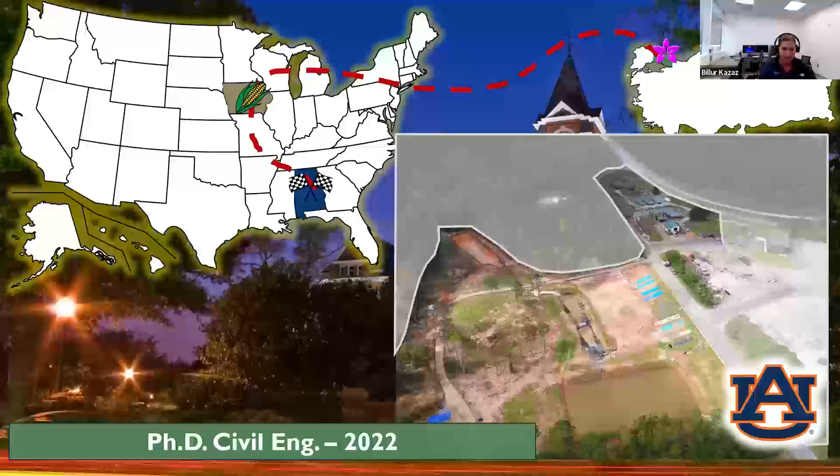Then it was my dream to come to the US for higher education. So my adventure took me to Iowa State, and that's where I got my master's degree. I joined Dr. Perez's group there. Iowa was too cold for me. As a research group, we moved down to Auburn. It was a warmer environment. I loved my time in Auburn. I got my PhD from Auburn University, where I did my research at this beautiful research facility, the Auburn Stormwater Research Facility. Here are some photos from my grad school days, where I was flying drones, building a flume, working in the lab, collecting soil samples. So I had a fun time during my PhD. It was a very hands-on experience.

With that, my next location was Atlanta. So I joined Geosyntec Consultants. I'm an engineer there working in the water resources group. As Matt mentioned, I work with multidisciplinary teams to provide stormwater designs. I provide compliance support to our clients, both for construction and industrial purposes. I couldn't move away from Auburn, so I stayed close to it.

With that, we can dive into flocculants. Due to the nature of disturbing activities and grading activities on construction sites, these sites tend to create a potential to discharge sediment into downstream water bodies. According to EPA, construction sites tend to create an annual soil loss up to 100 tons per acre. With that, there are rules and regulations in place, and the construction general permit requires us to implement stormwater pollution prevention plans on sites and incorporate construction stormwater management practices to minimize soil loss and capture sediment on site prior to off-site discharge.

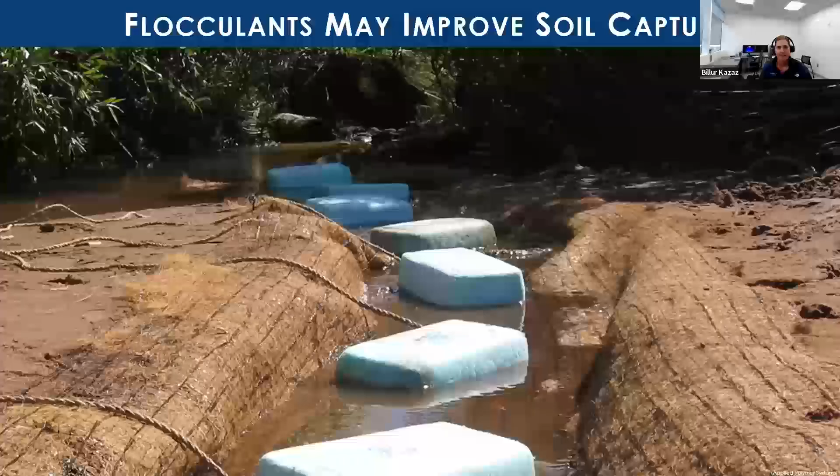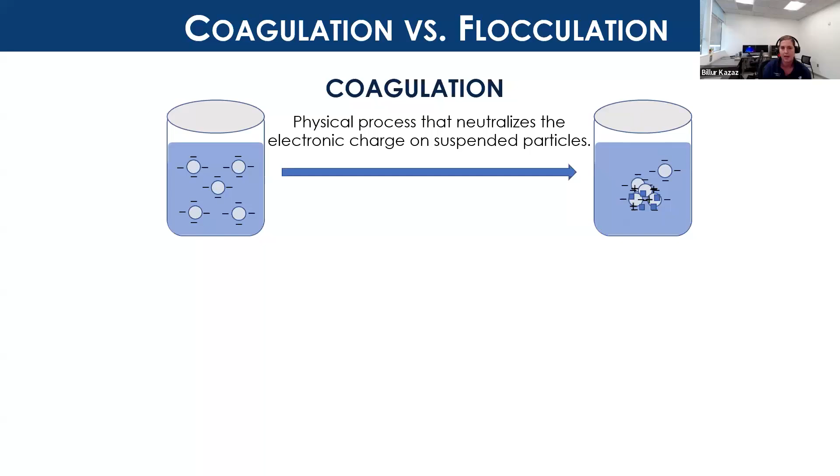So where flocculants come into play: flocculants are one of the tools that we can use to help capture sediment on site by capturing fine-sized soil particles when we incorporate them with erosion and sediment control practices. These chemical treatment tools facilitate coagulation and flocculation. So let's talk about these mechanisms a little bit. Coagulation is a physical process that neutralizes the electronic charge on suspended particles. Soil particles tend to have a negative charge. So when we introduce a coagulant into the system, they attract these particles through a physical process and neutralize the electronic charge. However, flocculation is a chemical process. When we introduce this chemical into the system, they build a bridging mechanism and they form larger flakes. We call them flocs, and they settle out of suspension through gravitational forces.

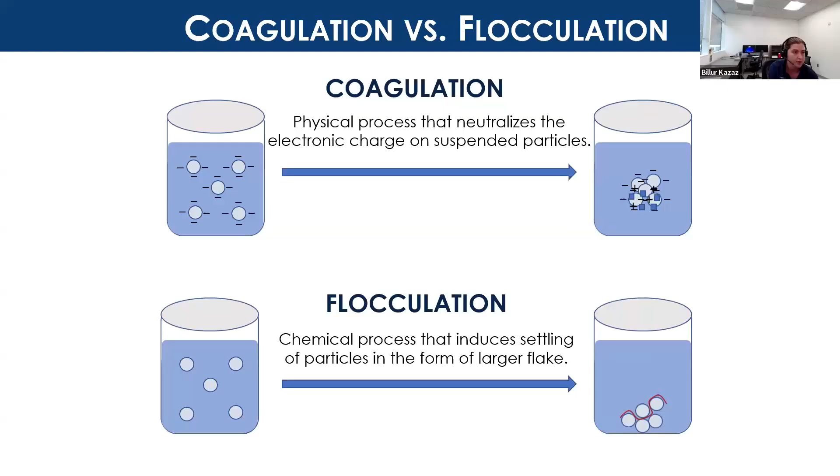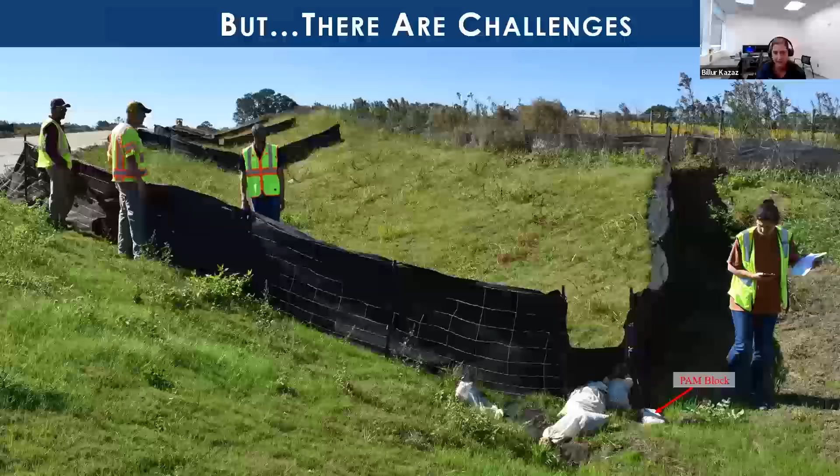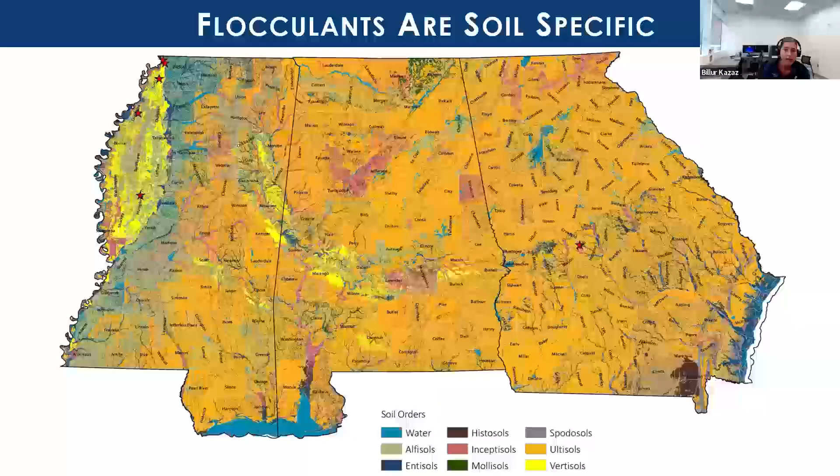But there are challenges while using flocculants. Here's a photo of me and the research team on one of ALDOT's sites looking at the condition of a PAM block. Flocculants are highly soil specific. That's one of the challenges. For example, in Alabama, there are 460 named soil series within 7 primary areas. On top of that, soils vary across a construction project as well. Since they're highly soil dependent, it becomes challenging to find the right product for the right soil type. And on top of that, a variety of products are available.

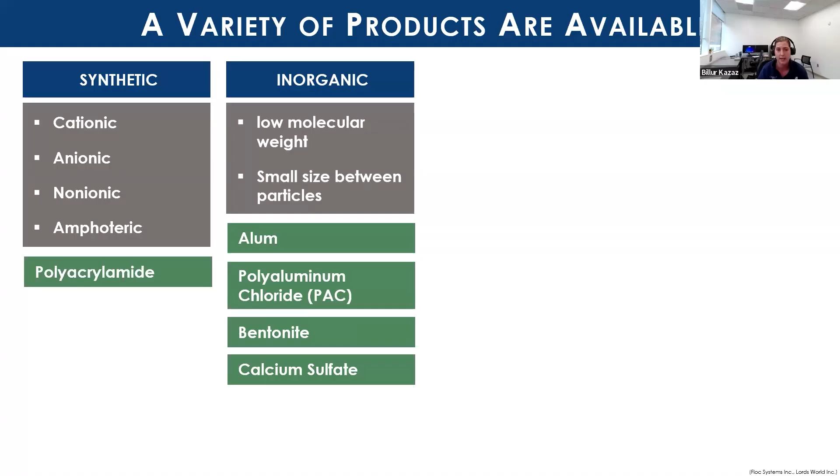So we look at flocculant types. There are synthetic flocculants. They're categorized based on their net charges. So there are cationic ones, positively charged, anionic ones, negatively charged, nonionic, and amphoteric ones. A good example of a synthetic flocculant would be a polyacrylamide, which is commonly used for construction stormwater treatment. There are inorganic flocculants. They have low molecular weight. They have small size between particles. A good example of inorganic flocculants would be alum or bentonite type of flocculants.

And there are bio-natural flocculants. They're based on animal and plant-based products. A very good example of this would be chitosan. Commonly, chitosan is considered a positively charged, cationic flocculant. However, it's actually a bioflocculant, but it becomes activated by cationic charges.

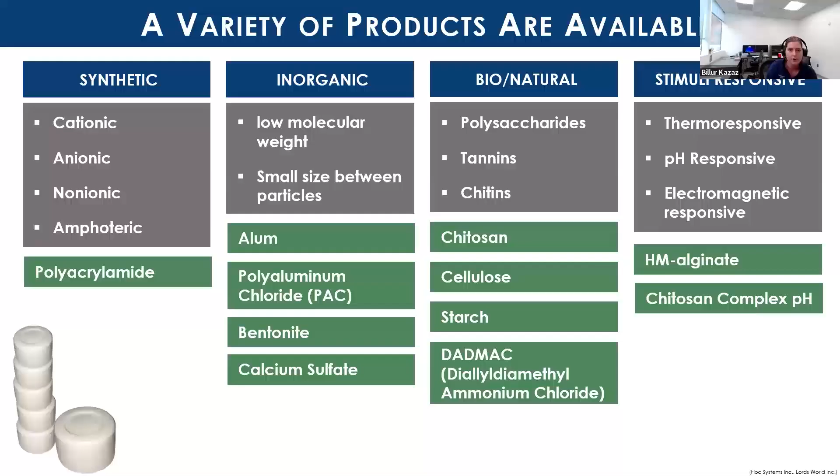There are also stimuli-responsive flocculants. These are not very commonly used types in construction stormwater treatment, but basically these flocculants are being produced in a lab environment by playing with their chemical characteristics. And there are also different forms of flocculants. There's a block form, there are sock forms, emulsion forms, and granular forms. So a lot of variety to choose from based on your needs on site.

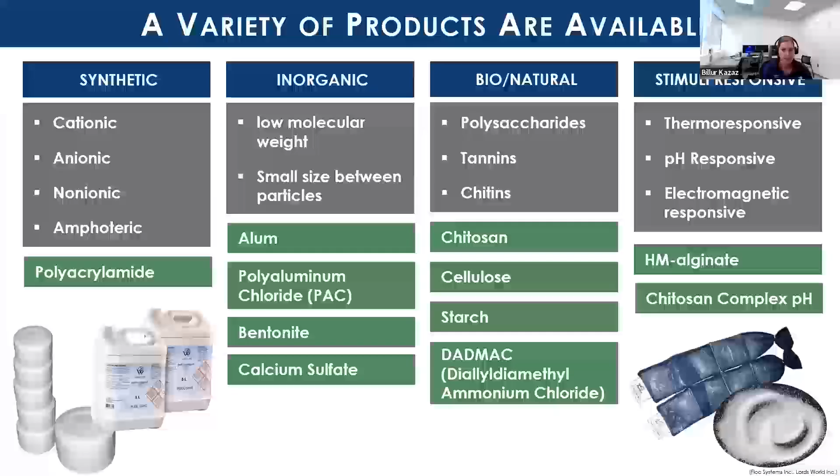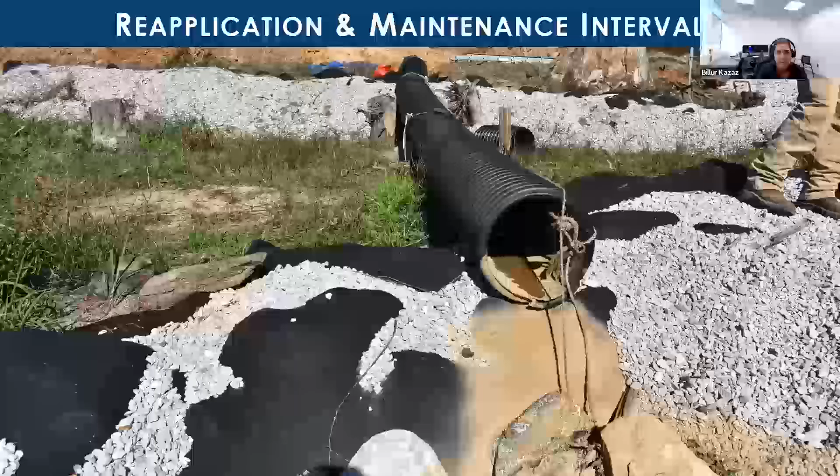So to effectively use flocculants, we need to answer several questions prior to product selection and field application. So one of these questions is, what are mixing and agitation requirements? Another one would be, what are the reapplication and maintenance intervals? So depending on the product that you're using, these can change.

So for example, floc logs need to be protected from the sun and sediment clogging, because with time, if they're clogged with sediment, they're not going to get dissolved easily. Same thing, if they're exposed to sun, they're going to dry really quickly, and they're not going to be able to deliver the dosage effectively. And the other question is, are there environmental risks? Are we overdosing? Do we need to know the residual concentrations at the downstream end of the site? These are the questions that we should think about.

There are also several application techniques out there. So here we're seeing some implementation from ALDOT. So they use powders at ditch checks. They also use socks downgrade of a ditch check as well. They utilize flocculants in sediment basins and slope drains.

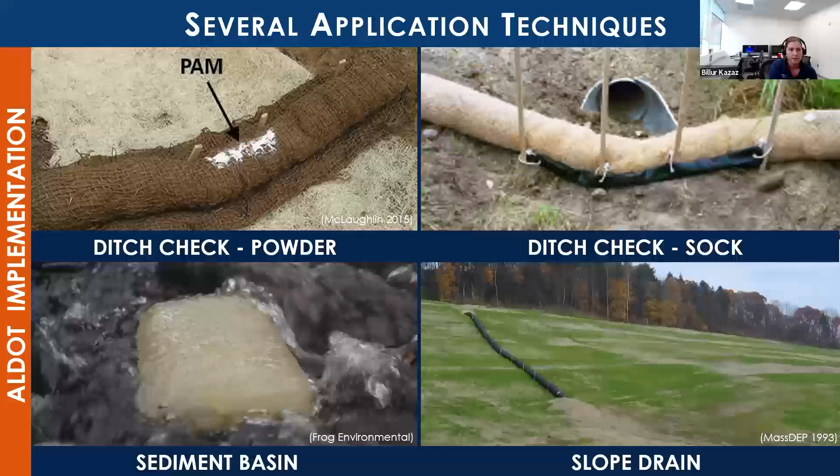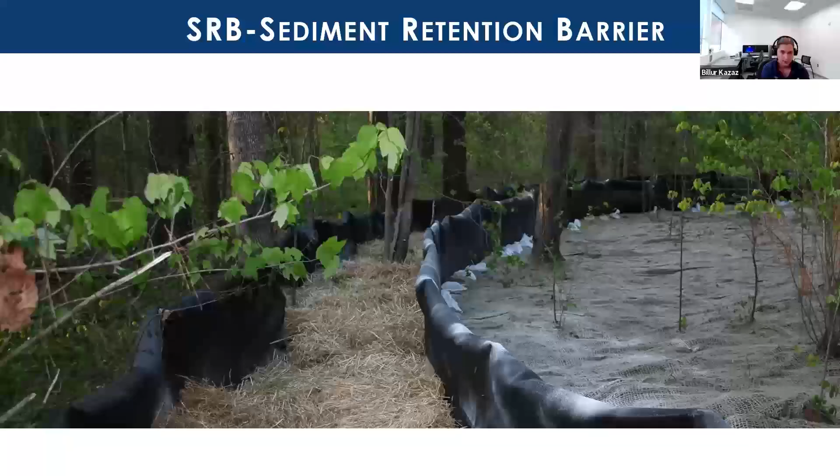And also, it's important to know the difference between passive dosing and active dosing methods. For construction sites, passive dosing methods are commonly used. Active dosing is providing more controlled and precise dosage delivery, and it's very commonly used for water treatment systems when they're using flocculants in that type of application. But on construction sites, passive dosing is more popular, which is a technique that is used to incorporate polymers into the sediment-laden stormwater.

So basically, we're incorporating flocculants together with existing erosion and sediment control measures. So these applications would include erosion control practices with dry granular flocculants. It could be hydromulch with emulsified flocculants. They can be used as check dams with dry granular flocculants, and floc logs can be used in pipes, risers, or prior to a sediment basin.

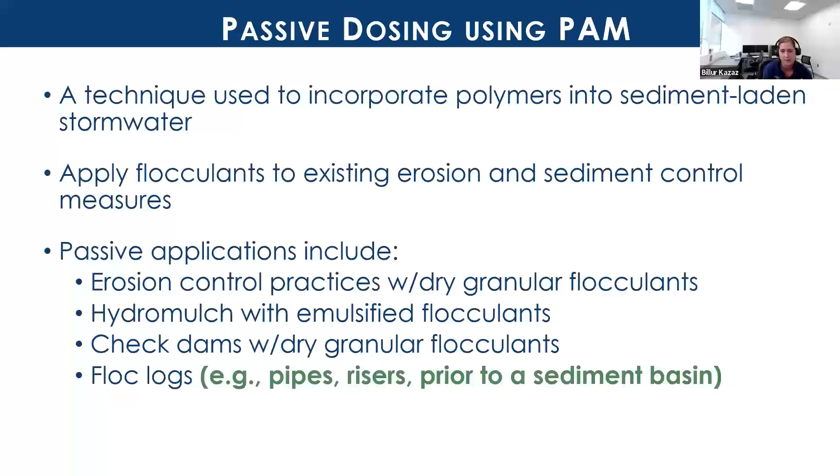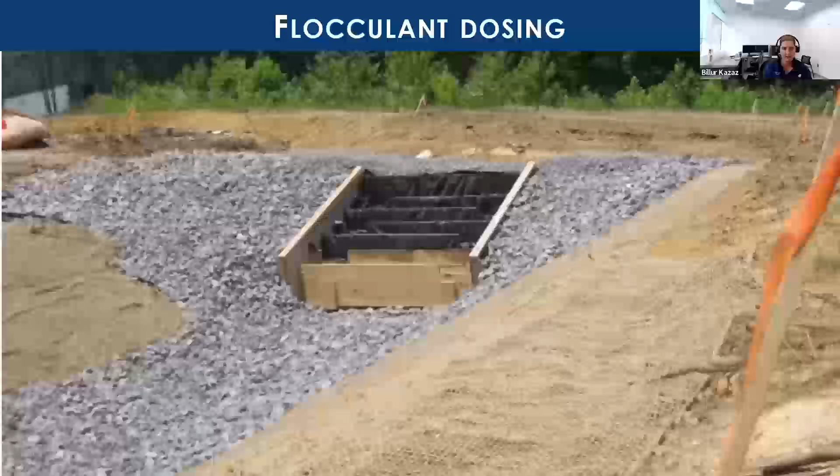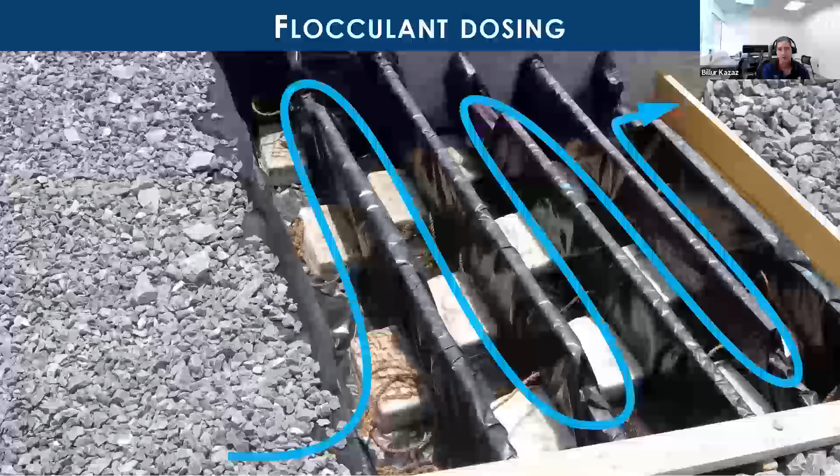And flocculant dosing becomes creative sometimes. Here's another dosing method that we saw on one of the sites: they place these logs, and basically when flow comes through the system, it gets dosed and then agitated, and with that they provide appropriate mixing and agitation to treat the water on site.

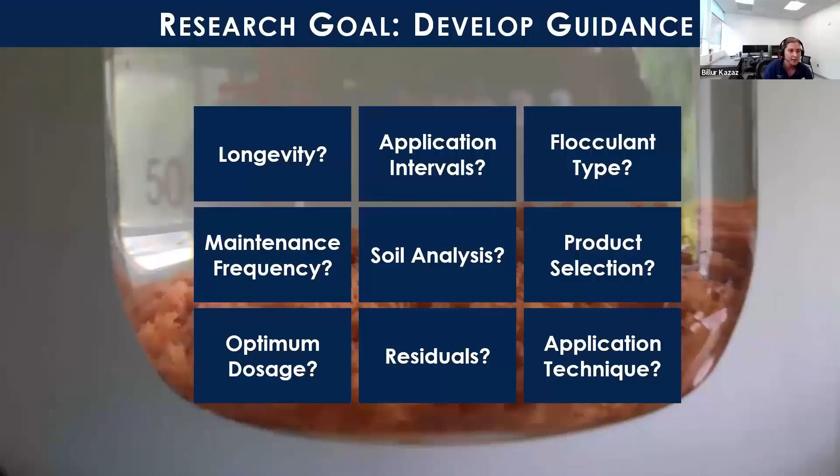But another question is, do current techniques work? So we collected all of these questions, and that actually formed our research goal to develop guidance. So we decided to provide guidance specifically to ALDOT for properly selecting flocculant type based on the soils on site. We also looked into providing guidance for delivery mechanism and mixing requirements.

For this research, before we get things started in the lab, we wanted to understand the current status of the practice. So with that, we implemented a comprehensive literature review first, and then we also conducted a survey. Our literature review focused on flocculation mechanism, flocculant types and forms. We looked into current studies in construction stormwater management. We also read through state highway agencies' erosion and sediment control manuals, and we also looked into residual testing methods. With that, we formed our survey questions, and we distributed them to the DOTs across the US.

So out of 51 DOTs, we had a participant number of 37. So 39% of the DOTs indicated that they are using flocculants, they're allowing flocculants on their sites. And the main concern that we observed is that the ones that were not using flocculants or hesitant to use flocculants were indicating that there's an unknown risk posed to receiving waters.

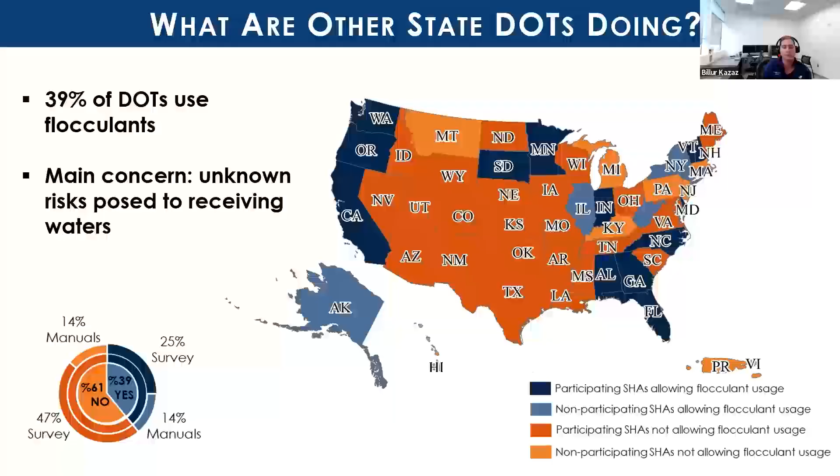So here's another result from the survey. We also asked about residual monitoring, and only 3 DOTs across the US are requiring residual monitoring. These are California, Florida, and South Dakota, and 10 of them do not require residual monitoring at all.

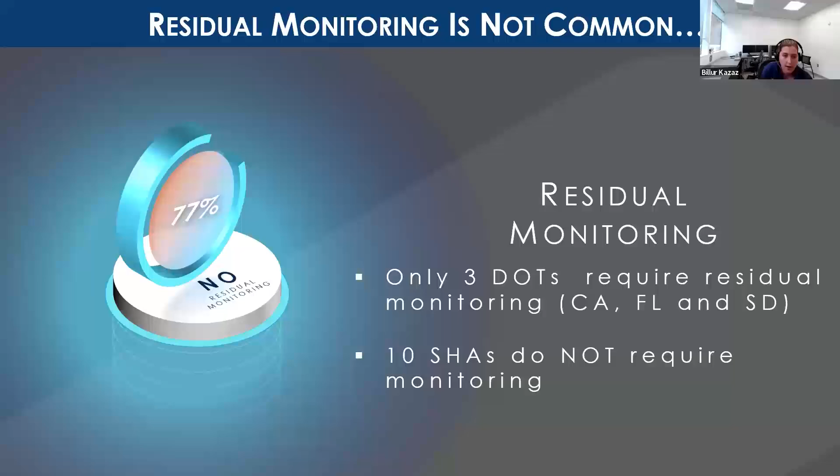We also asked about the guidance that they're using while deciding on dosage and product selection. So the majority is relying on manufacturer guidance. And then 2 of the DOTs have their own standard guidance for dosage and application rates. One of them is following toxicology limits that they have, and 3 DOTs do not use any guidance for dosage and application rates.

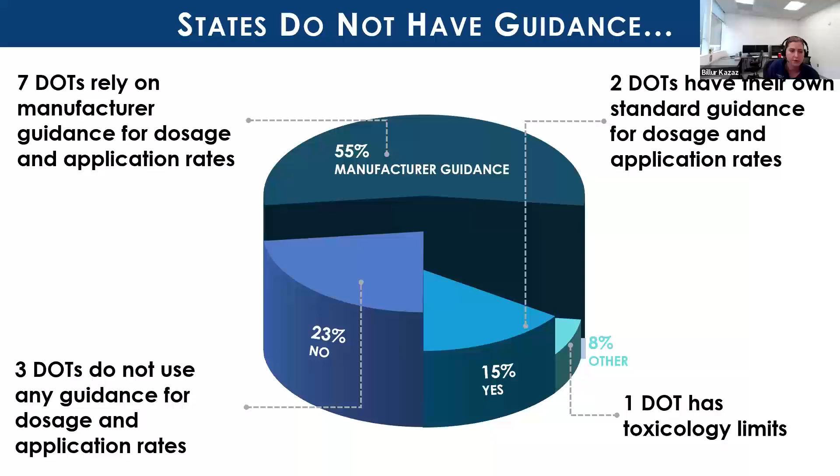These results help us to form our research goals and refine our research goals in a more comprehensive way, and we were able to prepare ourselves for the bench scale testing. So we want to do things right, and we want to start with soil sampling.

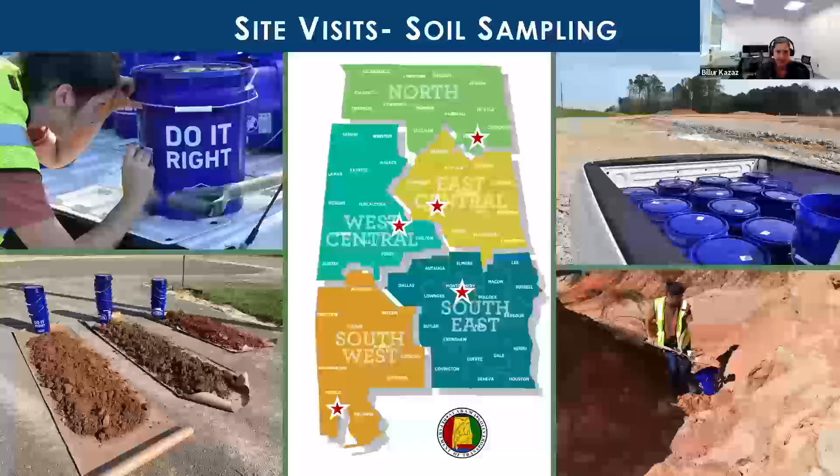As I mentioned before, flocculants are highly soil dependent, and because of that, we wanted to capture different soil samples across the state. So you're seeing 5 regions of ALDOT: north, west central, east central, southwest, and southeast. So we drove to all of these places, to the sites that they have out there, and collected soil samples. It required quite a bit of driving, but we were able to get all of the samples that we needed on time.

So the first thing that we did, prior to going on site actually, we looked into this through the USDA Web Soil Survey. So we knew the locations of the sites, and we tried to understand the characteristics of the soils out there that are available on Web Soil Survey, to see if it's going to match our analysis, and if we can predict soil characteristics without having to go to the site in real life, like in a construction project. Prior to selecting a flocculant, can a designer, for example, go into Web Soil Survey and select a type?

That was a question. But then we also conducted soil analysis to understand the physical characteristics of the soils. So we did a sieve analysis, Atterberg limits test, and a hydrometer test by following ASTM standards. And at the end, we also wanted to look into soil chemistry to understand the impact of cationic exchange capacity on flocculation. So we also conducted CEC analysis as well.

So here's a comparison of Web Soil Survey versus laboratory tests. As expected, construction sites are very dynamic, so the soils tend to change across the site. We collected 12 soil samples from ALDOT sites, and only 2 of them showed some sort of similarity in the physical characteristics. So this showed that we cannot rely solely on Web Soil Survey. It's important to evaluate the physical soil characteristics through soil testing.

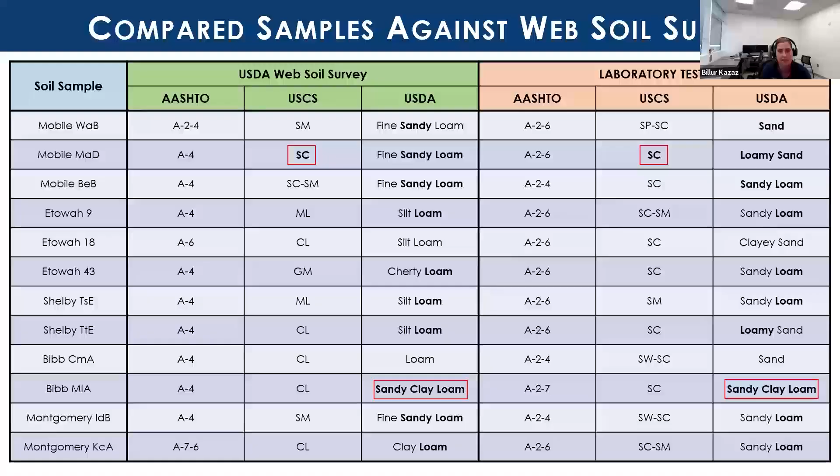As I mentioned before, we also looked into cationic exchange capacity. So we sent our samples to Auburn University's soil testing laboratory. They conducted this test and sent us the results. So cationic exchange capacity is a measure of cations that can be retained on soil particle surfaces. So the question here was, can we use CEC, cationic exchange capacity, to determine flocculant selection?

With that, 3 of these soils showed high amounts of CEC per clay content values, and cationic flocculants actually performed really well on these soils, for example. So it is important to understand the soil chemistry as well while evaluating flocculants.

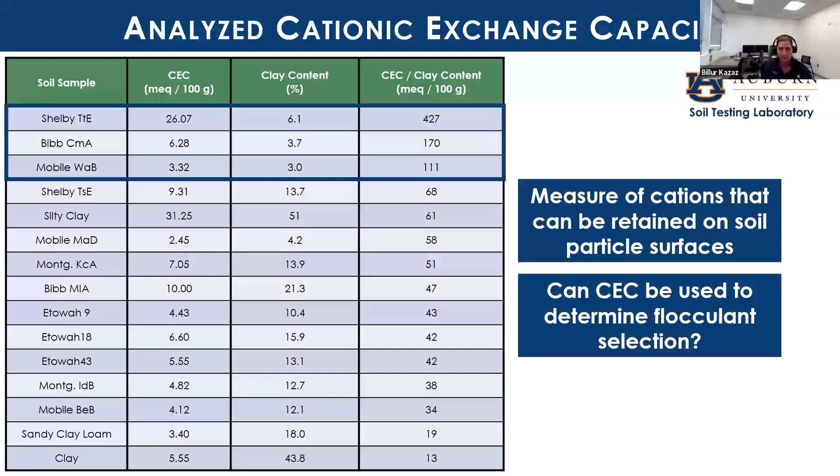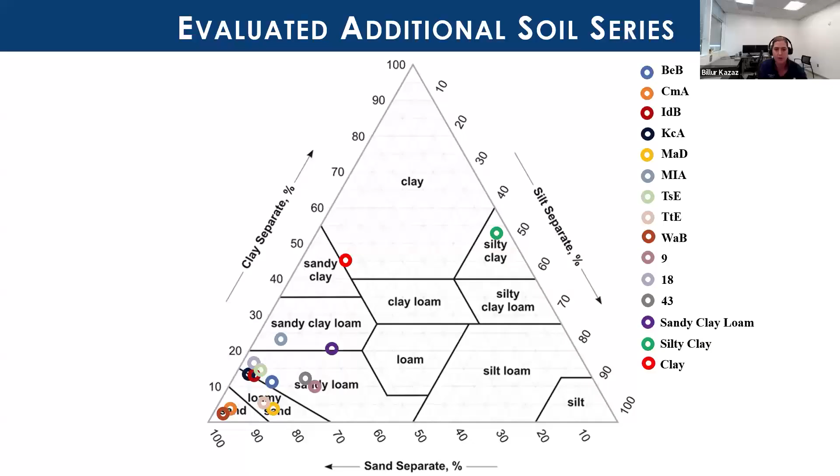And then we went into bench scale experiments. So first, we conducted jar tests, to answer this question: which products and flocculant types work with which soils? So for these tests, the purpose was to select the top 3 best performing products for each soil. So we had 15 soil samples in total and 14 products. So we followed ASTM standards for the mixing procedures.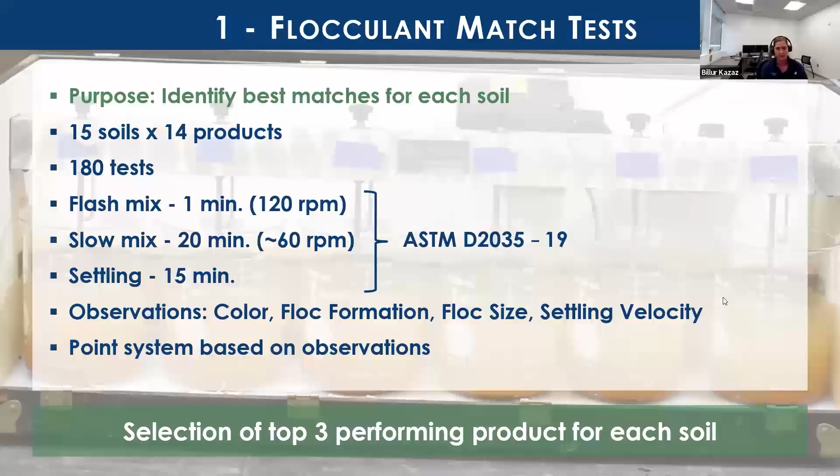So we flash mixed our samples at 120 RPM for a minute, and then we slowed down our mixing for 20 minutes at approximately 60 RPM, and then we waited for them to settle for 15 minutes. With that, we observed color, floc formation, floc size, and settling velocity. And we created a point system based on these observations, and we ranked the products based on this point system, which I will show in the next slide.

So as I mentioned, we looked into color, floc formation, floc size, and settling rate. So for example, if at the end of the testing I was seeing that the supernatant in the sample was light yellow, that would get 8 points. That means the flocculant worked on it. And then floc formation, if it's forming quicker, it's getting a higher point. If the flocs are bigger, it's getting a higher point according to this point system.

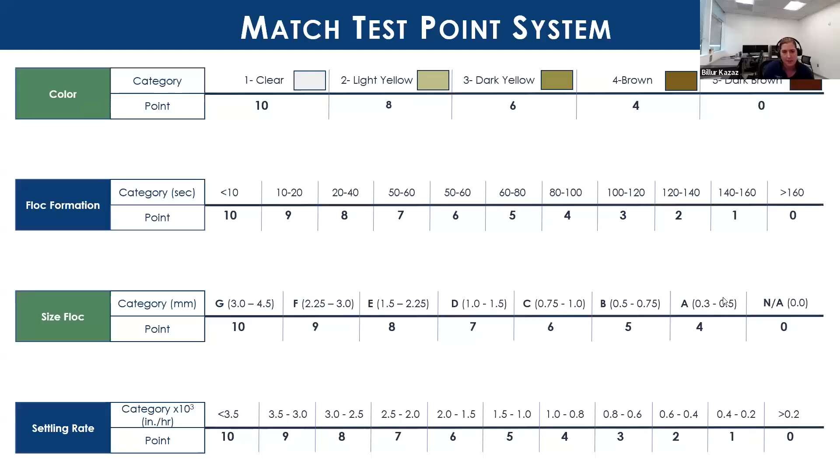And settling rate is another category that we looked into. If the settling rate is higher, then it's getting a higher point. With that, we selected the top 3 products that we were able to test across all of the soils that we collected. So this is a summary of evaluated flocculant products.

We had polyacrylamides mostly. As I mentioned, they're synthetic flocculants. We tested anionic polyacrylamides. Some of them were in granular form, and for some of them we formed stock solutions to test them.

And we also tested bentonite-based flocculant. We looked into chitosan. We also looked into combining chitosan with a coagulant agent. So those were in emulsion form. And then we looked into calcium sulfate, aluminum sulfate, and sodium montmorillonite. As you can see, dosage ranges are changing.

Before I explain dosage, I should mention that the orange circles that you're seeing are included in the LDOT approved product list. So the dosage rates that you're seeing vary. We reached out to the manufacturers and asked their dosage recommendation for the turbidity that we're going to try to treat in our testing setup and the amount of water sample that we're going to test in our testing setup.

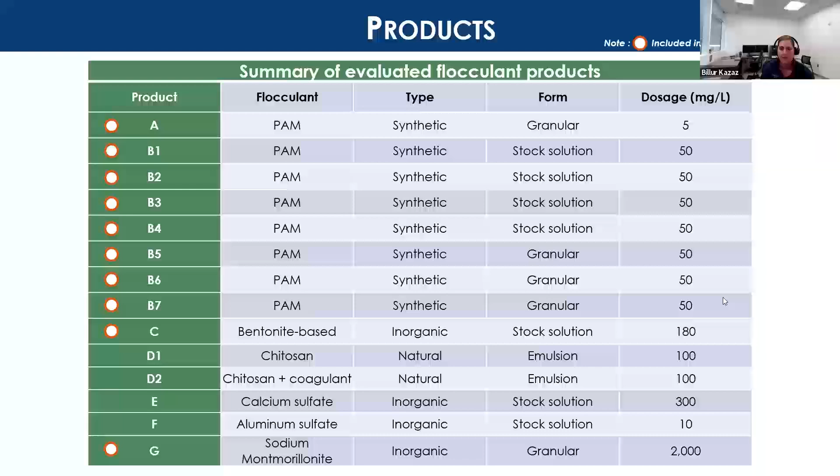One of the manufacturers actually miscommunicated the dosage rate, but since we ranged the dosage for under dosage and over dosage conditions, we were able to capture the actual dosage rate for PAM. So that was resolved with no issues throughout the research.

Okay, so with match test results, this is a summary of what we were able to observe. So we selected, as I mentioned, top 3 best performing products, and the majority show that polyacrylamide across all of the soils was working really well. And in some of the soils, we saw that chitosan is also working well, and sodium montmorillonite as well.

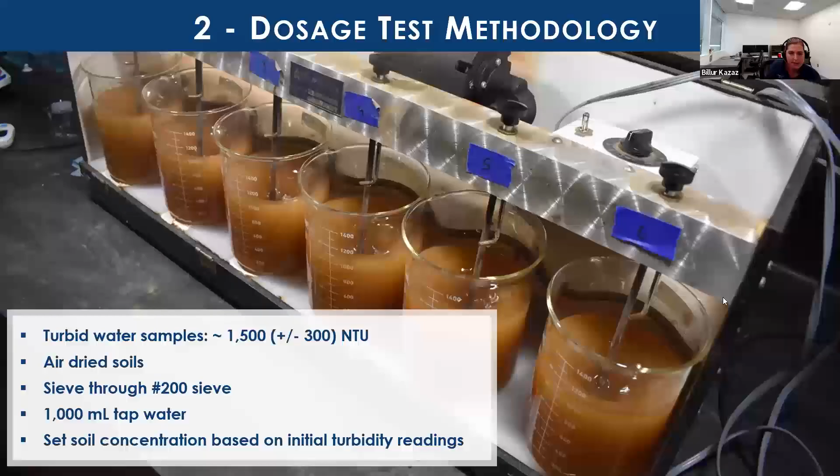After completing match tests, we selected our flocculant types that we're going to test in the dosage test. The dosage test was trying to understand what is the optimal flocculant dosage we should be using. Again, we had the same test setup as you saw in the match test, but we used turbid water samples of approximately 1500 NTU plus minus 300 NTU. We used air-dried soils for this testing. We sieved our soils through a number 200 sieve so that we can just use the fines. And we used 1,000 milliliters of tap water, and we set soil concentration based on initial turbidity readings.

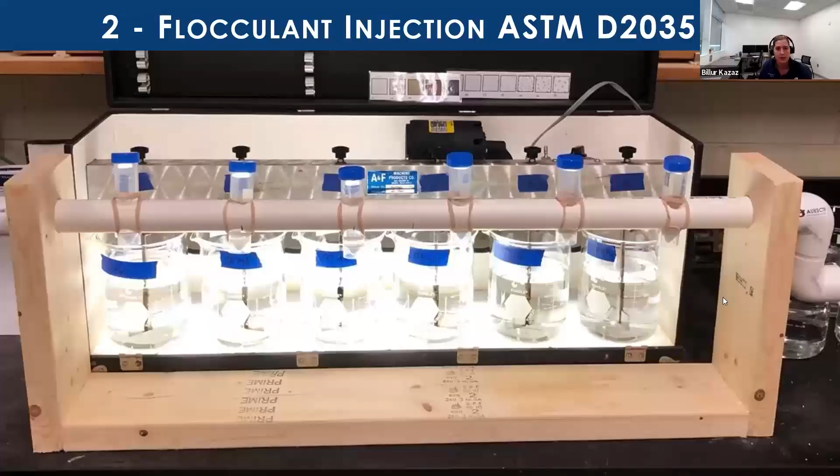Here's an injection rack that we built for our testing. If we are testing a stock solution, this was helping us to inject everything at the same time.

With dosage trials, the purpose was to identify the optimum flocculant dosage rate, and dosage ranged between 0% to 200% of the manufacturer recommendation. Again, we had 15 soils with top 3 best performing products per soil, and we did 3 replicates of this testing, and we did again flash mix, slow mix, and settling phases per the ASTM standard. For this testing, we looked into turbidity, pH, color, and temperature.

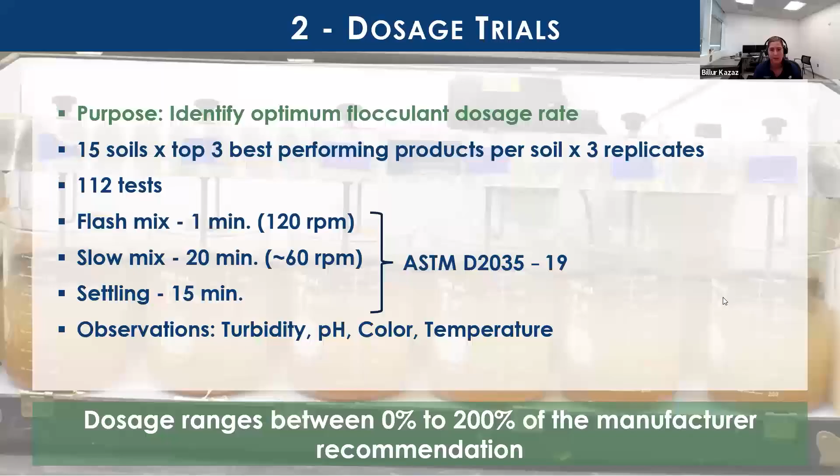So now you're seeing a video of the flash mix phase. 0% is the control. Here's an example of it. Manufacturer recommendation is 5 milligrams per liter for this specific product. And then we ranged these throughout the testing. So we looked into underdosing condition and overdosing condition.

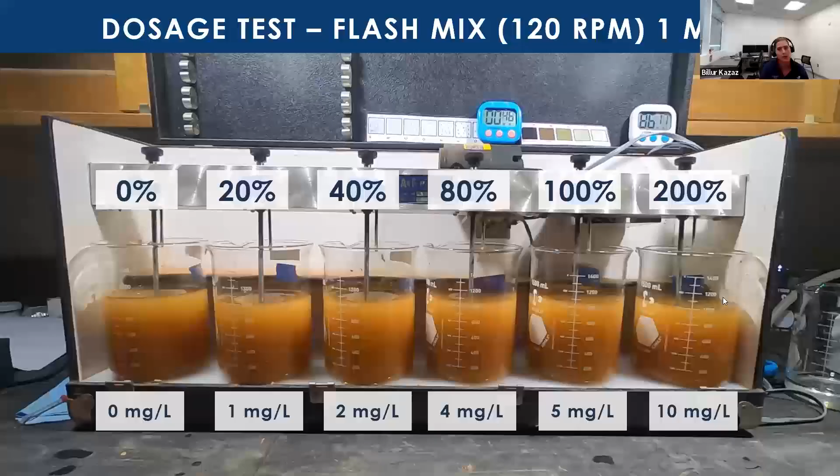Here we're looking at the slow mixing phase. At this point, you can see that flocs are forming, and 0%, 0 milligrams per liter, is our control jar. And once they settle, we collect the supernatant, and we looked into turbidity reduction of it, and pH, color, and floc size.

So it is important to know that in a lab environment, we can see that, but maybe manufacturers are providing this dosage considering that field conditions may create product wash off, and field factors may impact this. So maybe they're providing slightly higher dosages, but it's important to know that we observed great performance in lower underdosage conditions.

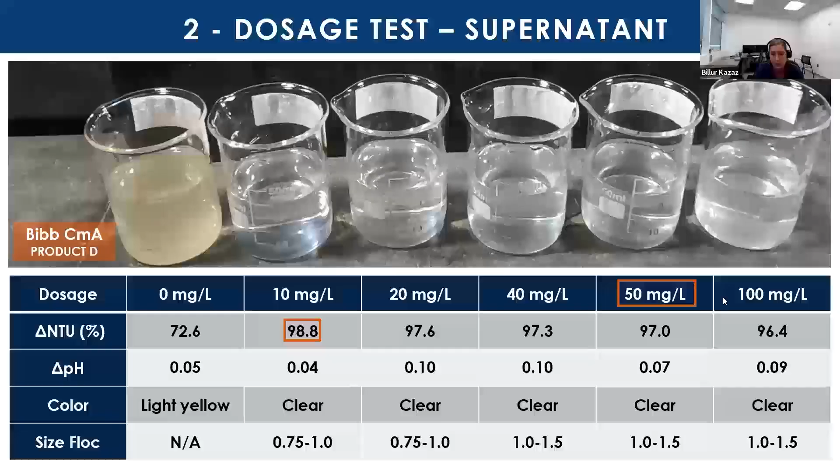Here's another example. Here we are testing another soil with 3 products A, E, and F. This is a PAM product, calcium sulfate and aluminum sulfate. We are seeing, again, with lower underdosage conditions, sufficient turbidity reduction on this product.

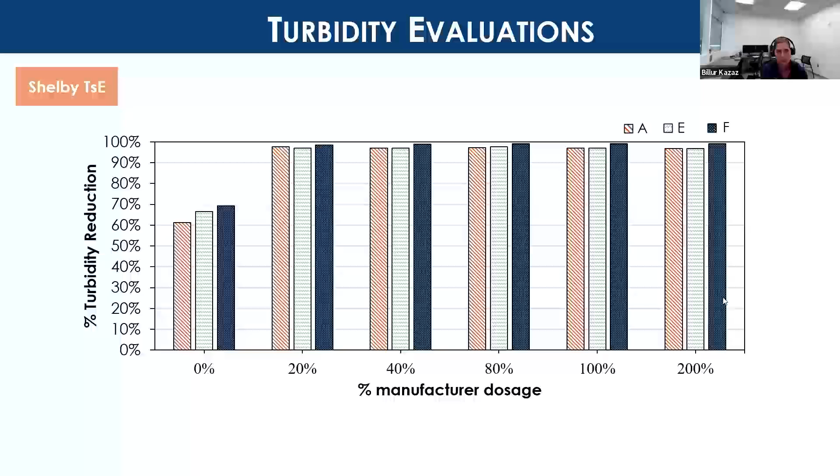We looked into pH measurements as well, as I mentioned before. So in products A and E, we saw that for E, in overdosing conditions, when we are doubling the manufacturer recommended concentration, it's creating some difference in pH, but it's not too substantial. Product A also created a pH difference in one of the soils, but it was not substantial enough. But product N was significantly decreasing the pH of the samples.

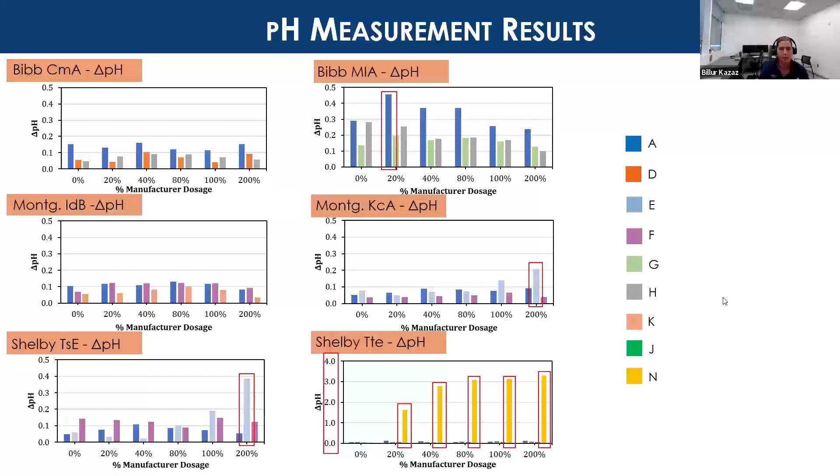So with that, we excluded this product from our further testing, and this product is also no longer in ALDOT's approved product list. So it's important to look into pH while evaluating flocculants as well. Then the third thing that we looked into was residual testing. How can we measure concentrations being discharged?

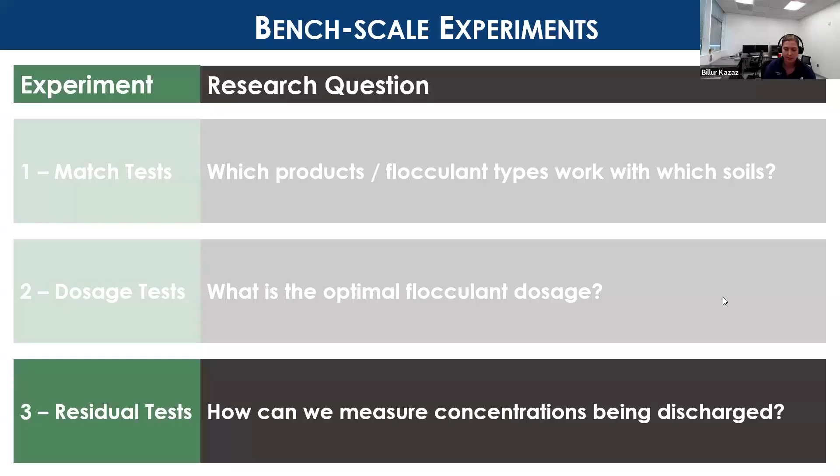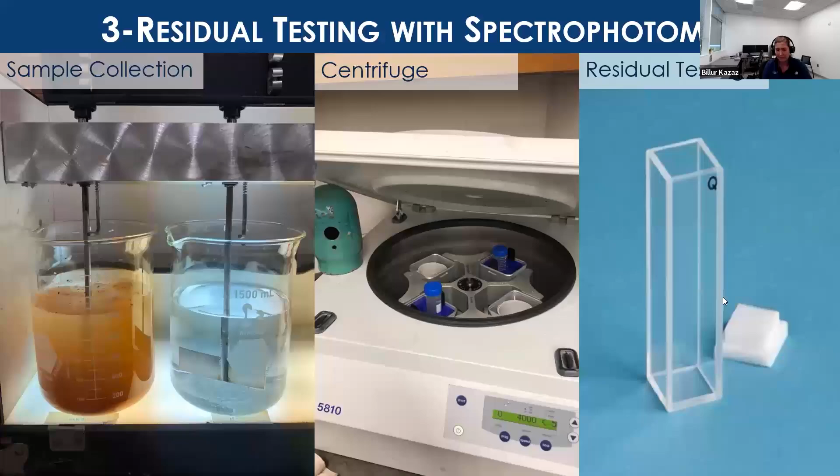So first, we looked into using a spectrophotometer. Basically, I collected a control sample with known concentrations. I centrifuged them, and then I put them through a spectrophotometer and tried to relate flocculation with the results of the spectrophotometer.

However, we realized that by the time I would rotate the samples and place them in the sampling tube, and by the time the spectrophotometer could send the beam through, the flocs would form even with control samples, and they would settle. So we wouldn't be able to read the concentrations from them.

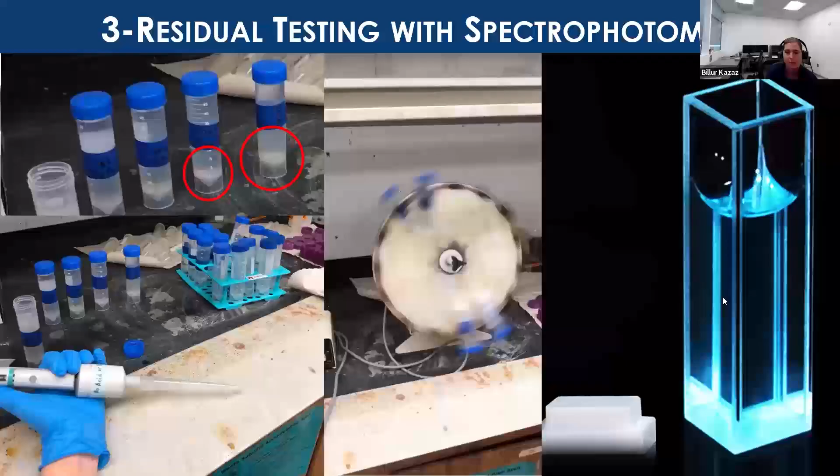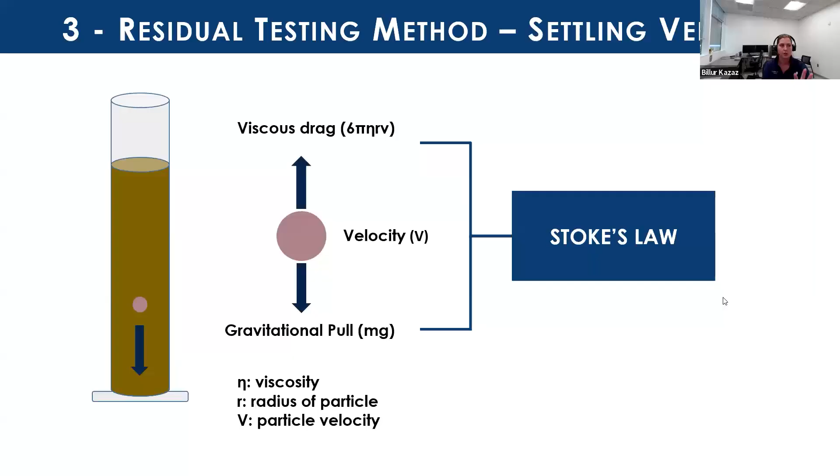With that, we changed our focus onto settling velocity. So we looked into Stokes law. Stokes law indicates that a particle travels in liquid under viscous drag and gravitational pull. So we said maybe we can relate known concentrations to settling velocity.

So we used a testing soil that we had available at our facility. The reason that we picked this specific soil is because it had high clay content, it had a well-characterizable color palette, and it had a short settling period.

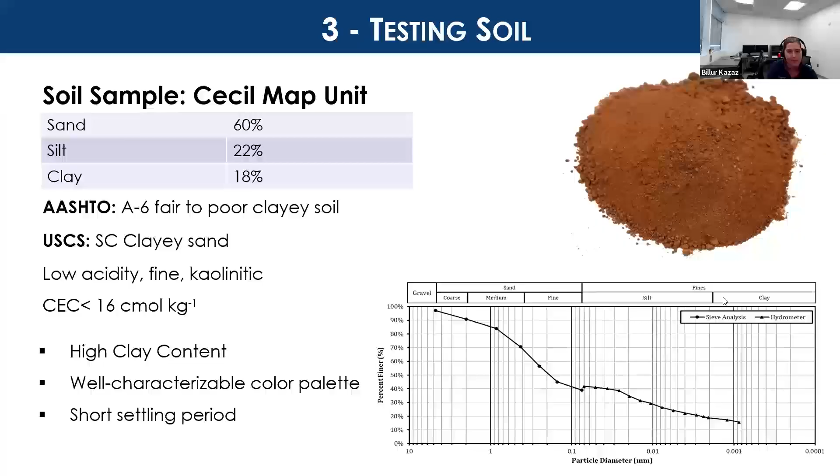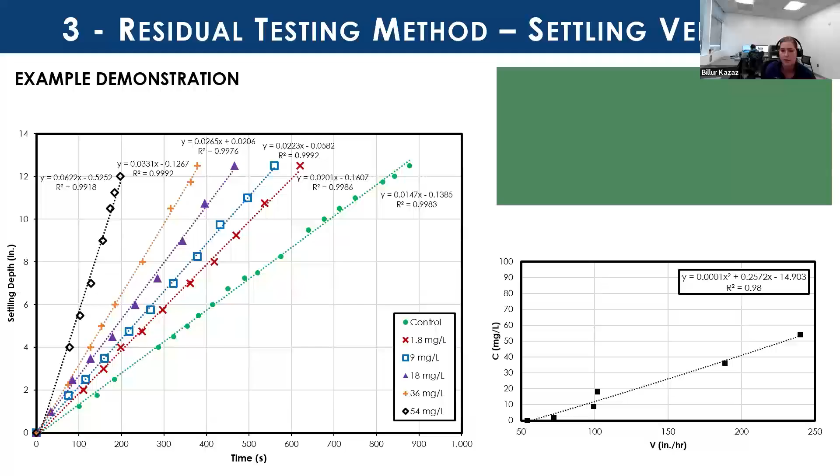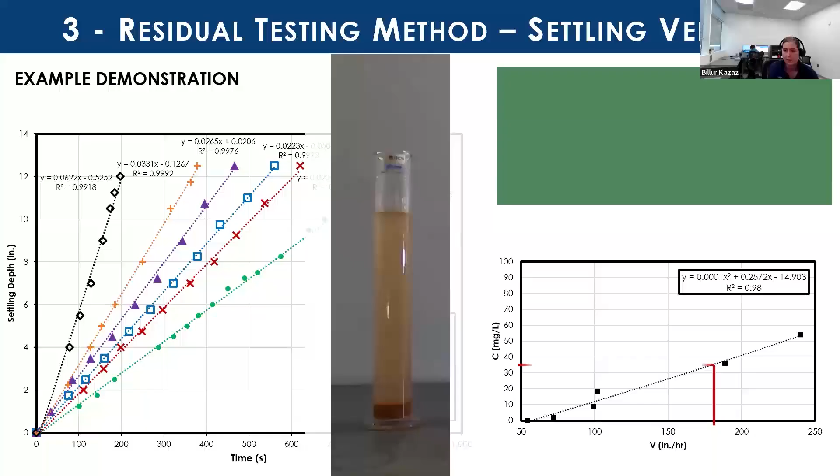So with that, let's say we grab a sample from the field and mix it with our testing soil. We observe the settling rate, so we can calculate the settling velocity. If the settling velocity, for example, is 175 inches per hour, we can put that on our calibration plot, and that would estimate around 35 milligrams per liter of residual in this sample.

So if the dosage rate was 50 milligrams per liter and the residual is 35 milligrams per liter, that would mean the residual to application dosage was 70%. We did this for multiple products and got reasonable values to form our calibration curves. And I know that after I graduated, Auburn stormwater researchers did additional investigation on this, and they improved these calibration plots significantly.

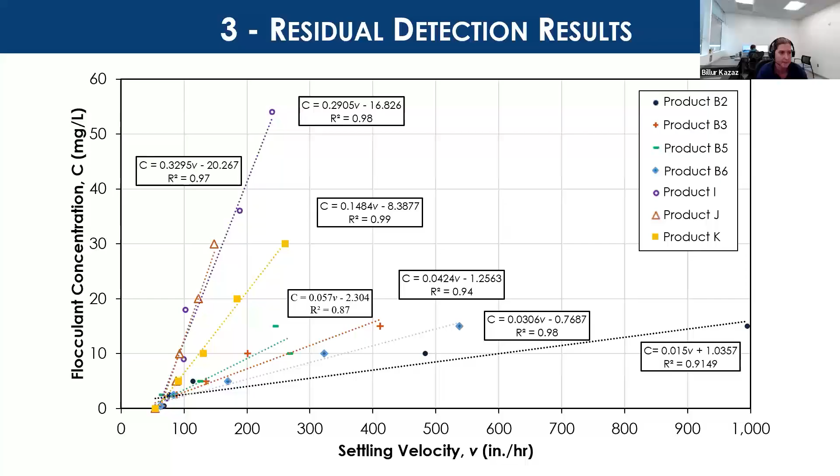So let's talk about the findings of the bench scale testing. We tried to answer which products and flocculant types work with which soils. Through soil assessment and bench scale testing, we were able to identify step by step what we need to do to select the right products for the soil types that we see. We understood that flocculants are highly soil dependent, and soil chemistry and soil characteristics play a role in this.

The second question we had was, what is the optimal flocculant dosage? Again, through the dosage testing that we conducted, we observed the product variability. We looked into underdosing and overdosing conditions, and we saw that in underdosing conditions, we can achieve substantial turbidity reduction. And we also understood the importance of evaluating pH while using and dosing flocculants.

And the third question was, how can we measure concentrations being discharged? With that, we looked into settling velocity observations, and we provided standardized residual concentration plots. This really helps us form a field applicable method to quickly test flocculant residuals on site.

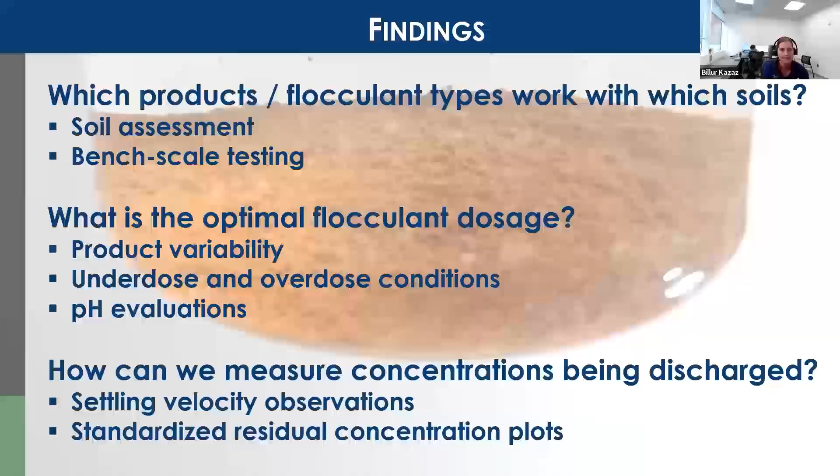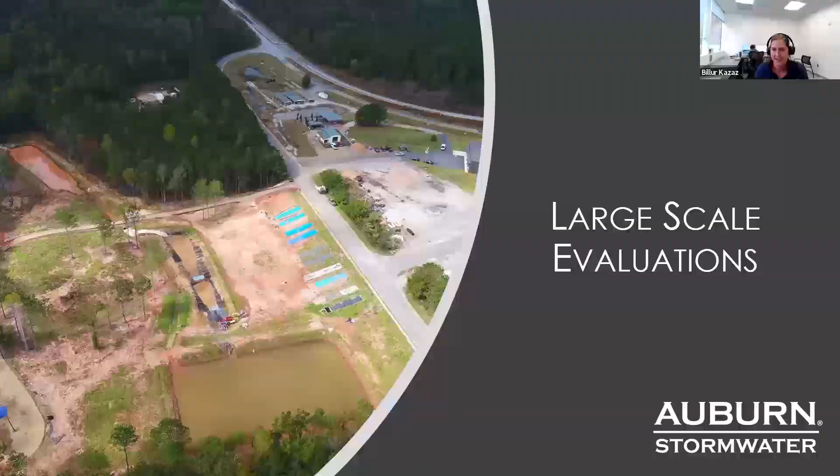Then we took this into large scale evaluations. You're seeing a beautiful photo of our facility, which I took with a drone back in the day, but I'm sure a lot is changing out there, so I'm excited to see it again sometime soon. So we took this into large scale evaluations, and we conducted flume experiments to answer these research questions.

The first question was, is proper mixing and agitation being achieved? Is a target concentration being introduced into the system? And what is the degradation of the delivery mechanism?

So here's the flume testing setup. We first built the flume and calibrated it, and then we had supercritical flow tests. Through supercritical flow tests, we tested four flocculant forms: granular form, block, sock, and an aqueous solution we formed using a granular product.

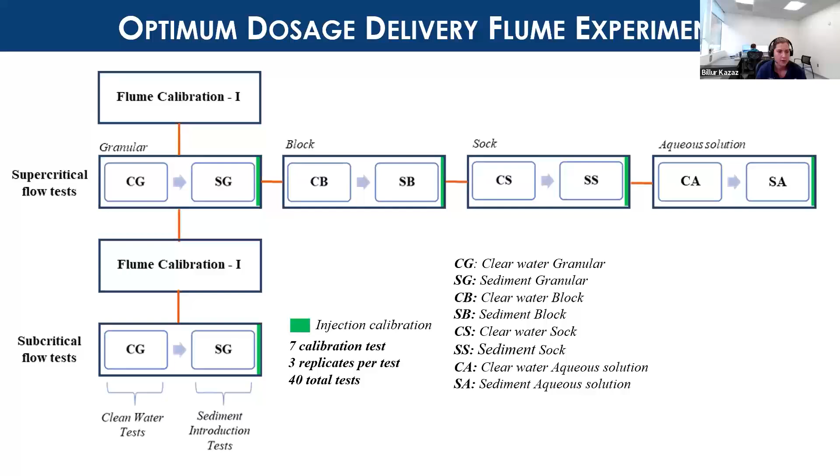Basically, we tested clear water conditions, and we tested sediment introduction. Then we recalibrated our flume and conducted subcritical flow testing. So again, we had clean water tests and sediment introduction tests through this setup.

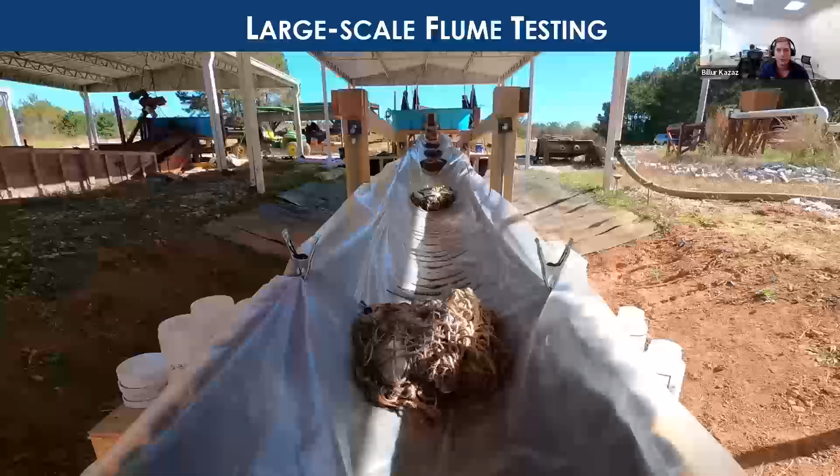So here's a photo of the flume. It was a 40-foot long flume that we conducted at the facility. We lined it with plastic jute matting, and we also mimicked check dams into it to increase agitation and mixing.

Here's the experiment setup. So as I mentioned, we had supercritical flow and subcritical flow testing. We used this testing to conduct our optimum dosage delivery experiments, and we also looked into longevity as well. For the soil, we had a control condition, for which we used clean water, and then we had a testing soil at the facility that we utilized through flume testing.

And for sampling, we had control samples upstream of the flume where we did not have any flocculant introduction. And we also collected samples from the midsection, which represented a low agitation condition, and then downstream of the flume, which represented a high agitation condition. For measurements, we looked into turbidity and residuals.

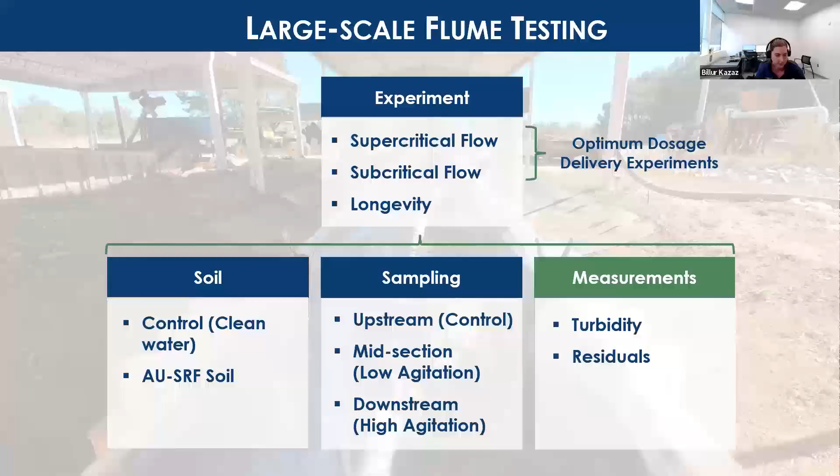So these are the forms that we tested in supercritical flow experiments. So as I mentioned, we mimicked check dams throughout the flume, and we wrapped them with jute matting so that they can catch the flocs. So we had a sock that we formed based on the dosage recommendation. So we placed it right in front of the check dams.

And we had a solution. We used tubing and a pumping system to continuously pump solution into the system. And then we also zip tied blocks in front of the check dams as well, and we utilized powder on the check dams where they're receiving the concentrated flow.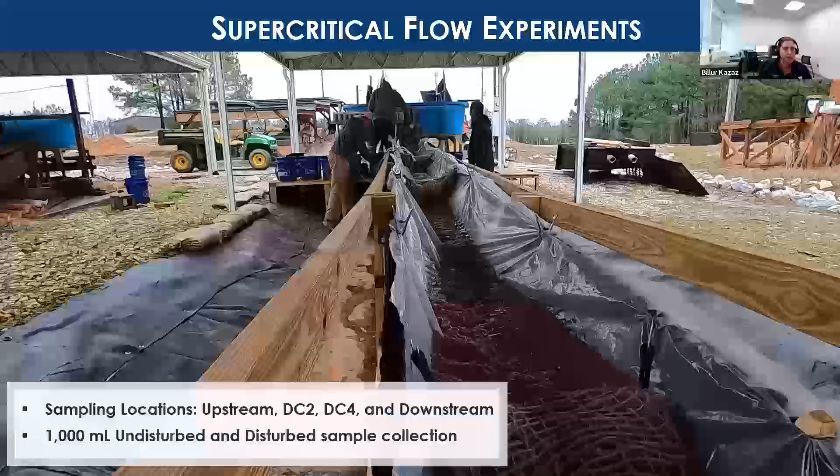So here's a quick video of the supercritical flow experiments. So throughout the flume, we had 4 sampling locations: upstream, ditch check 2, ditch check 4, and the downstream location. So we collected 1,000 milliliters of undisturbed and disturbed samples. The undisturbed samples were tested immediately right after the test for turbidity, and the disturbed samples were taken into the lab, mixed in our mixer, and tested for turbidity and residuals.

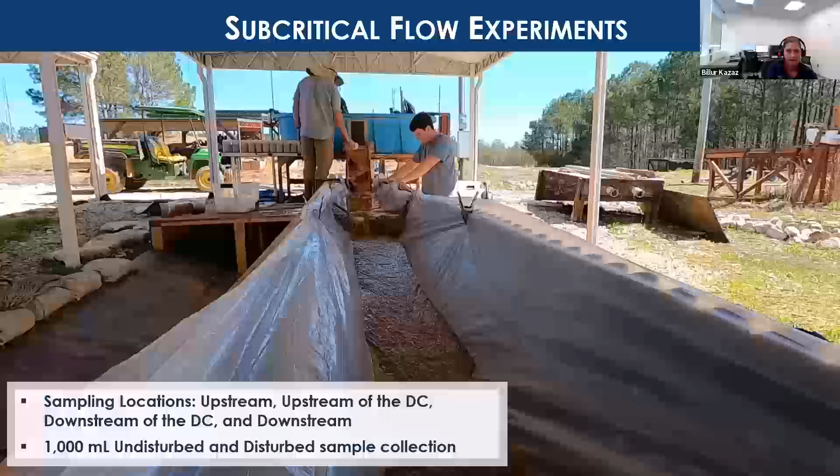And now here's a video of the subcritical flow experiments. So for subcritical flow, we adjusted the slope of the flume, and we sampled from upstream of the ditch check. We had only 1 ditch check in here, and then downstream of the ditch check and downstream of the flume. Again, we had 1,000 milliliters of undisturbed and disturbed samples.

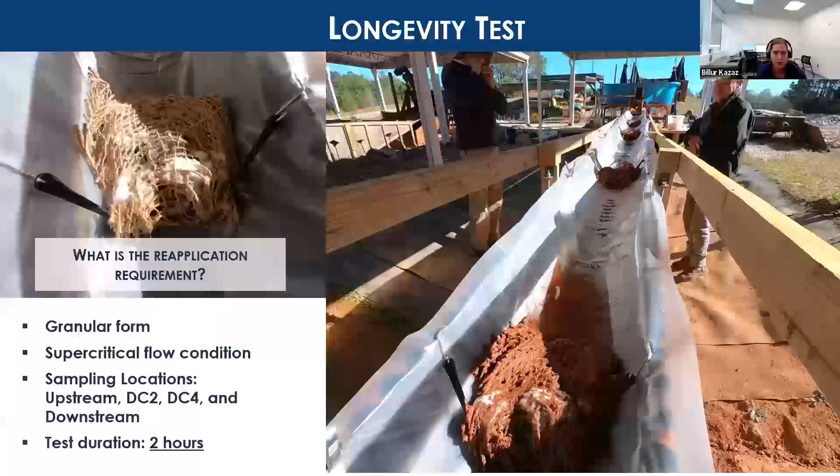And then we also looked into longevity, as I mentioned before, to answer what is the reapplication requirement for the granular form. And we tested this in supercritical flow conditions, and the test duration was 2 hours.

So with the disturbed samples, as I mentioned, we took the samples to the lab and flash mixed them for 1 minute, and we waited for them to settle for 15 minutes and took the turbidity readings. And then for residual concentration monitoring, we separated the supernatant of the samples, flash mixed it for 1 minute with our testing soil, and then we observed the settling velocity and related that to our calibration curves.

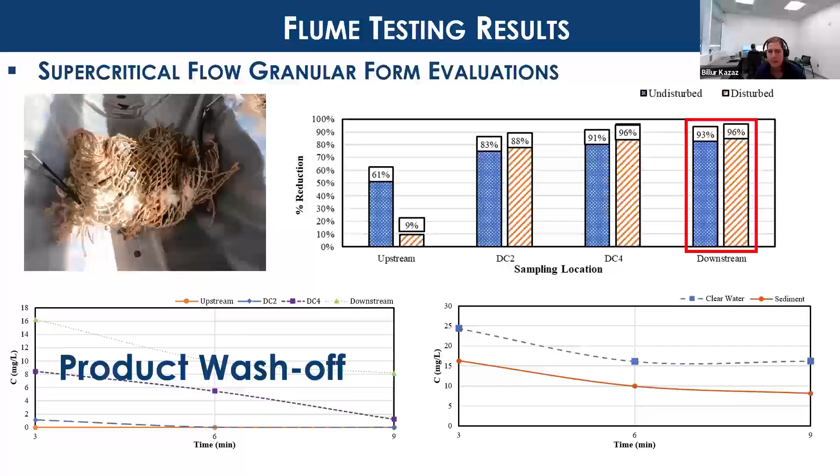And we also compared clear water versus sediments. Of course, we are seeing more concentrations in clear water samples because flocs are not forming, but with sediment, flocs are forming and they're settling out of suspension, so the residual in the supernatant has low concentrations.

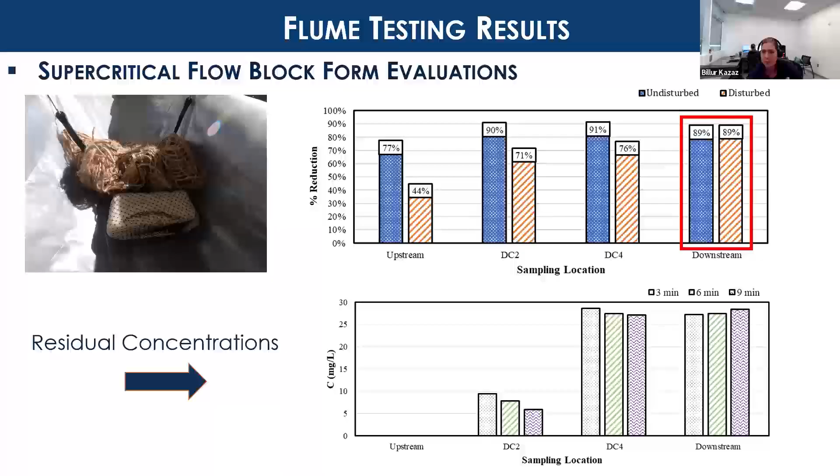For the block form, we observed that the block is providing more continuous dosage throughout the flume, and again, we were able to deliver dosage at the downstream of the flume, comparing undisturbed and disturbed samples.

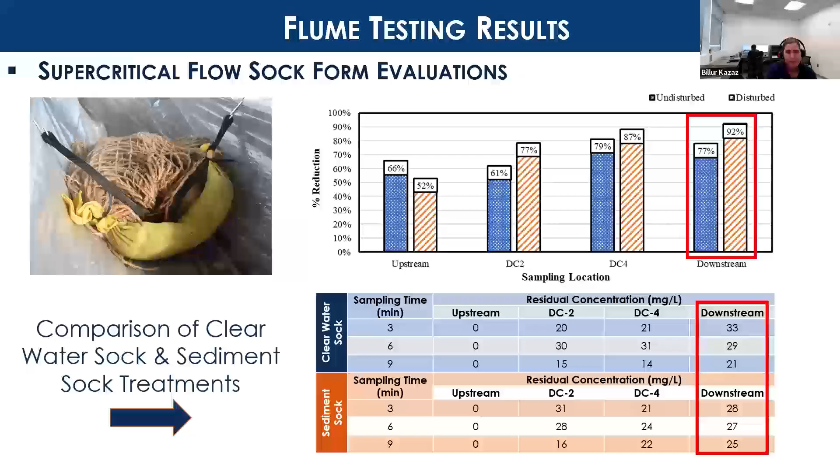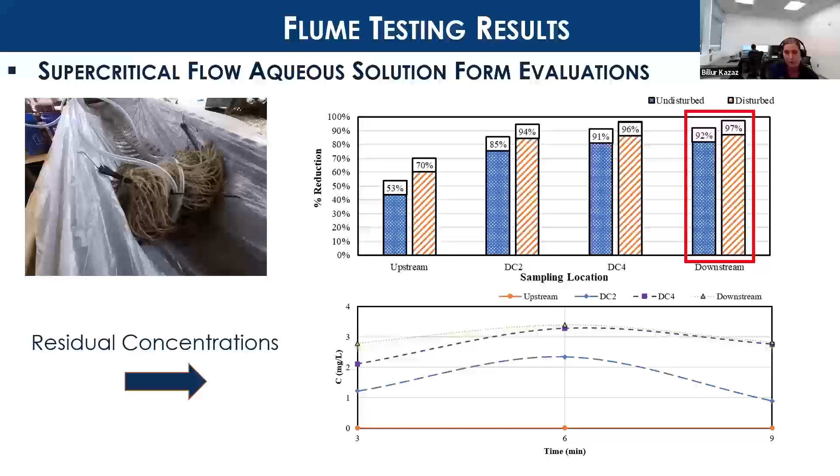Then we compared the forms through statistical analysis. With that, we observed that there's a significant difference in turbidity reduction performance between flocculant forms. Block and granular tend to have more similar turbidity reduction performance, but aqueous solution is significantly different because it's more controlled.

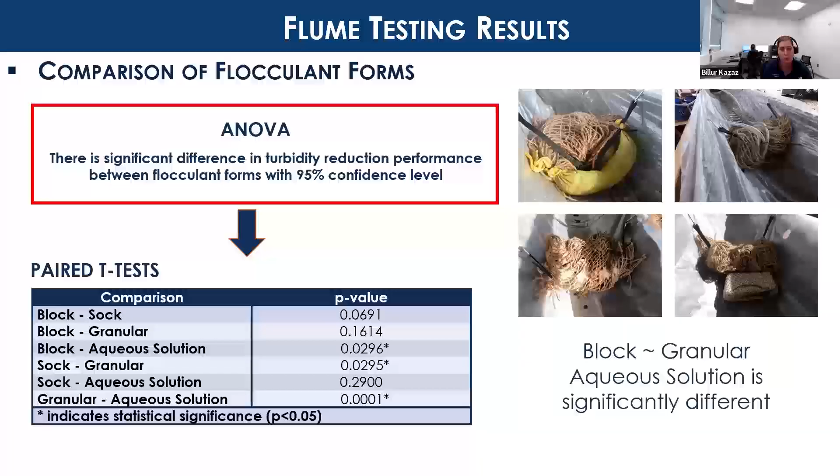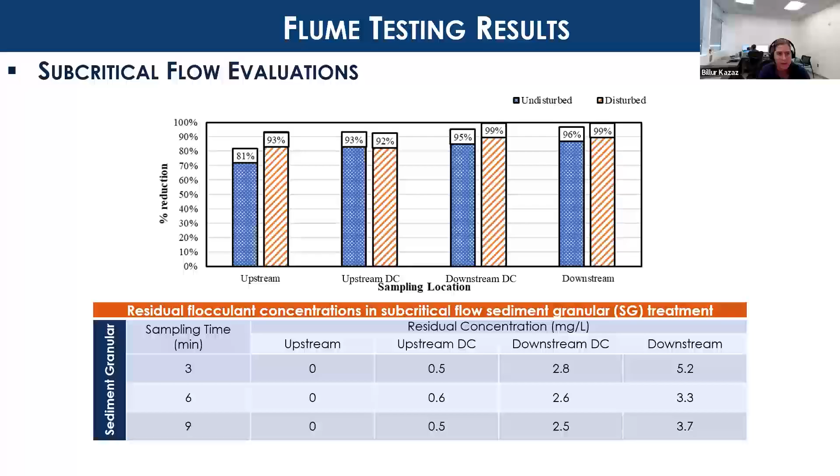And then here's a result of the subcritical evaluations. Of course, since the condition changed, we were able to deliver the dosage throughout the flume easily compared to supercritical conditions. So the results indicated that, and also residual concentrations showed that in subcritical conditions, we can control the dosage easily compared to supercritical conditions.

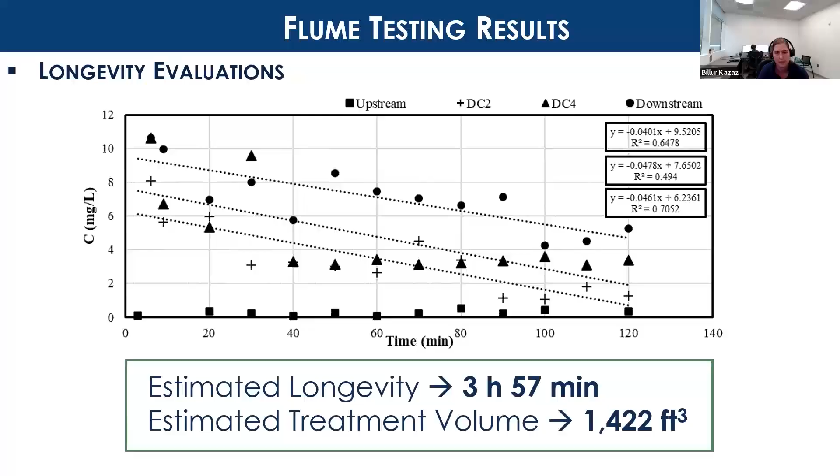And looking into longevity testing, this plot is showing each location that we sampled from: upstream, ditch check 2, ditch check 4, and downstream locations. So with time, with granular product, the product is washing off. So we were able to calculate estimated longevity at approximately 4 hours, and then we calculated estimated treatment volume of this testing as approximately 1,400 cubic feet.

With that, we were able to answer these questions. So is proper mixing and agitation being achieved? Upstream flocculant introduction is highly important. We should not be using flocculants downstream of the practices, especially prior to off-site discharge. We should allow distance between introduction and discharge location so that we are not releasing higher residual concentrations into downstream. And also this way we can promote agitation and mixing and floc formation.

Is a target concentration being introduced? We validated that through flume testing. We validated our bench scale testing results. It's important to have a complete flow contact with flocculants. And residual monitoring is essential if there's an agency that is concerned or if the regulation is requiring residual testing, just to be sure that we are not overdosing.

And what is the degradation of the delivery mechanism? Longevity tests come into play. We did a preliminary testing, but with more products, with more flocculant forms, I think longevity tests should be conducted in future research. And there's a huge difference in flocculant forms, so it's important to select the right product, but also the right flocculant form for your specific application.

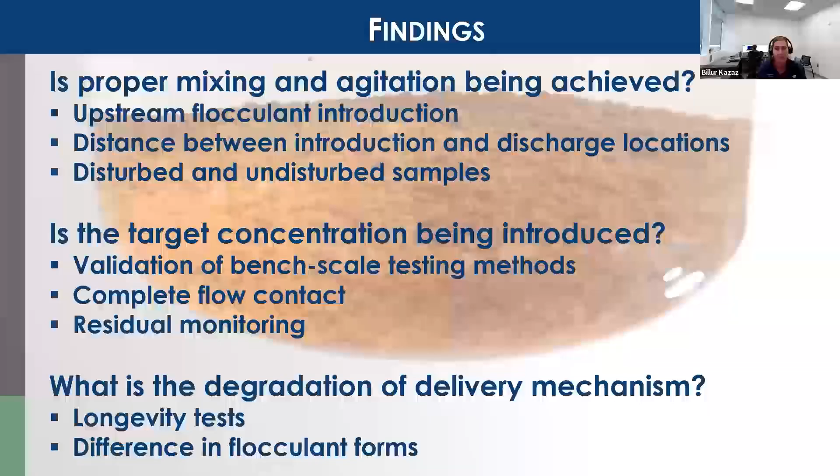With that, that wraps up the research that I conducted during my PhD, but if you have any questions, I'm happy to answer them. Well, thank you, Billur. That was an excellent presentation, definitely eye-opening.